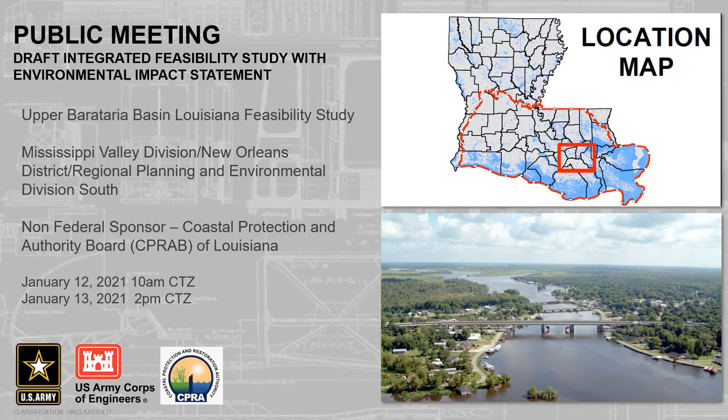Quick agenda for review. I will be discussing with you the purpose of this meeting, the authority, ongoing coordination, and overall schedule for the study. Then Matthew Boland, our lead plan formulator, will walk you through our feasibility level of design, process, and the methods that determined our recommended plan and revised levee system.

We are here to let you know that the Corps is completing a study to reduce flooding impacts to the Upper Barataria Basin through a structural alignment constructed to a 1% AEP, the 100-year future design, and totaling a little over 30.6 miles in length from Lulling to Raceland.

We have held public and stakeholder meetings from the start of the study in 2018 to keep communication open and transparent. We have held the pre-scoping meetings, scoping meetings, and draft report meetings over the last 2 years. These meetings were aimed at updating the public on our progress since you last heard from us, while gaining input from the public. We hope you will have a chance to read our current draft report, which can be found on the UBB website, and make comments by January 25th.

When we talk about creating or starting a project, the Corps needs 2 things from Congress. First, we need the authority. That is essentially permission to start a project or look at a concern. The UBB feasibility study was federally authorized through a House of Representatives resolution in 1998.

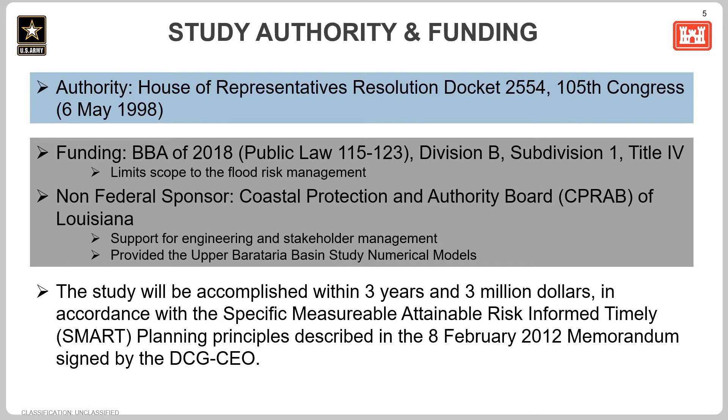I am now going to discuss our study timeline so that you can get a better idea of where we are in our 3-year schedule. Early on in the study, we looked at various ideas and ultimately determined a comprehensive levee system was the best way to manage flood risk within the study area. We presented the plan as the TSP in October 2019. Since that time, we have held our agency decision milestone in March of 2020 and completed feasibility level design on our tentatively selected plan, which resulted in some considerable changes to the alignment and impacts. And that is why we're here with you today.

Before we sent out the second draft, we completed several internal, technical, and quality control reviews, and now we are having the documents reviewed by the public, outside sources, known as the Agency Technical Review, and a policy review. When the public review ends on the 25th of January, we will be addressing comments and sending the report to our Office of Counsel before our final report leaves the district this March. Then, after several months of Washington-level reviews, we will have our Chief's report, the final product, signed in October 2021. Hopefully that gives you a good idea of what we have accomplished so far and what work we have remaining.

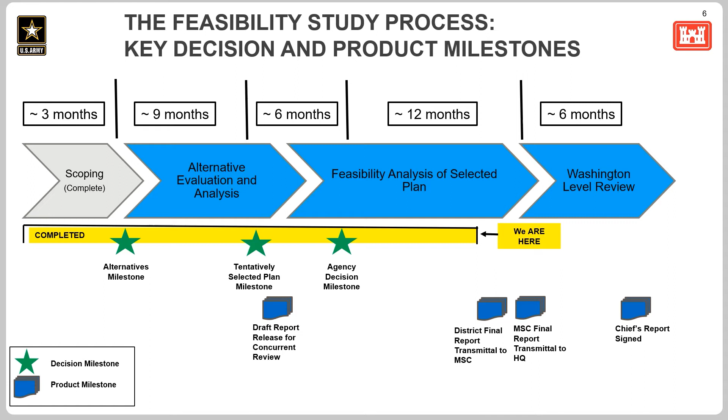About a year ago, the project delivery team came out with a draft report. Since then, we've had many changes during the feasibility design of the project, and we felt that we needed to go back out to the public to announce these changes in the project description.

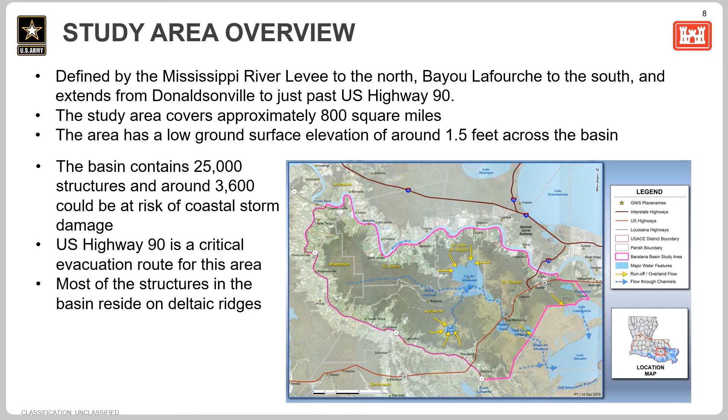Alright, the study area hasn't changed between draft releases and still includes the communities of Ascension, Assumption, Jefferson, Lafourche, St. Charles, St. James, and St. John the Baptist. The study area is bound to the north and the east by the Mississippi River Levee and to the west by Bayou Lafourche. And at the south it extends just past Highway 90. The study area covers approximately 800 square miles and is characterized by low, flat terrain with wetlands, numerous navigational canals, drainage canals, and natural bayous that drain into Lake Salvador and eventually into the Gulf of Mexico.

As a recap of the draft report, the project delivery team developed a total of 10 alternatives, not including the no action option. These alternatives consisted of structural and non-structural measures and combinations thereof. Some examples of structural measures were the incorporation of ring levees, flood walls, flood gates, and pump stations. Some examples of non-structural measures were house raisings, dry proofing of non-residential structures, and buyouts. After a few iterations of the formulation process, Alternative 1 was determined as the tentatively selected plan, or TSP, with the highest net benefit and benefit to cost ratio above unity.

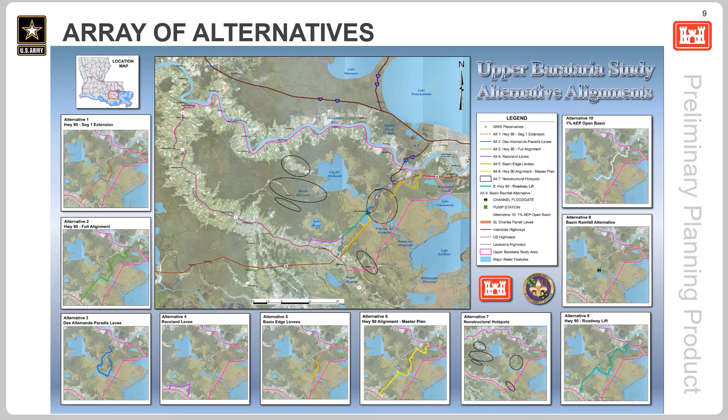The first draft report release proposed Alternative 1 as the tentatively selected plan. It was an 18.3 mile levee proposed, which was the red line in the image, and it extends out from the St. Charles levee, which is the light brown line in the image, extending from the Mississippi River levee down to just south of Paradis.

Then it raises the existing Sunset levee, crosses the bayou just south of Dufresne Ponds, and continues parallel to US Highway 90 until it reaches high ground near Mathews. It was proposed as a 7.5 foot elevation levee with a total cost of $514 million and a benefit to cost ratio of 1.5. This levee would have been built as a 2% AEP levee,

but would provide much more like a 100-year level of risk reduction based on the optimization of storage and allowable overtopping rates in the area where structures would not be affected. In order to maintain the resiliency during overtopping, the backside of the new proposed levee and the entire existing St. Charles levee would have been covered with HPTRM, which is high performance turf reinforcement matting, to prevent the backside of the levees from being eroded during overtopping.

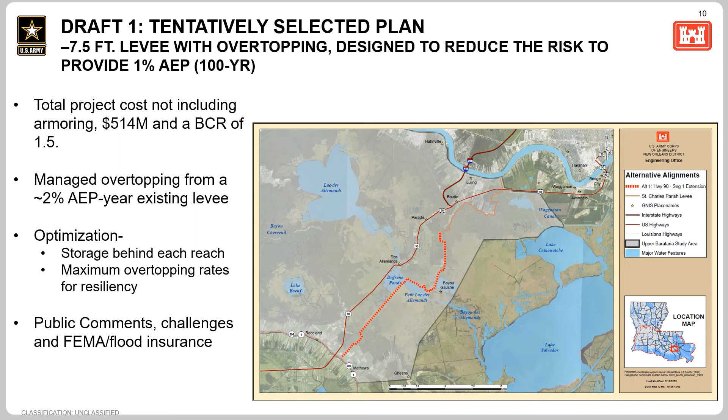This is a recap of the tentatively selected plan for the first draft report. We proposed an 18.3 mile levee extending out from the existing St. Charles levee system. The existing St. Charles levee resides at a 7.5 foot elevation. The length of 18.3 does not include armoring of the St. Charles levee. We plan on armoring the whole backside of the system to allow for the overtopping of water into areas where there wouldn't be structures damaged.

The total footprint of direct impacts on this alternative were 345 acres. This alternative would be built to a 2% AEP, but would perform much more like a 1% AEP with optimization of the levee elevations and the rate of overtopping in those areas. There was no non-structural plan developed at the time. We were still waiting on H&H modeling results at that time to put out that information. With the current plan, we do have that now. The total estimated cost of this plan was $514 million. The benefit to cost ratio was a 1.5, and the average annual net benefits were somewhere around 30.3 million.

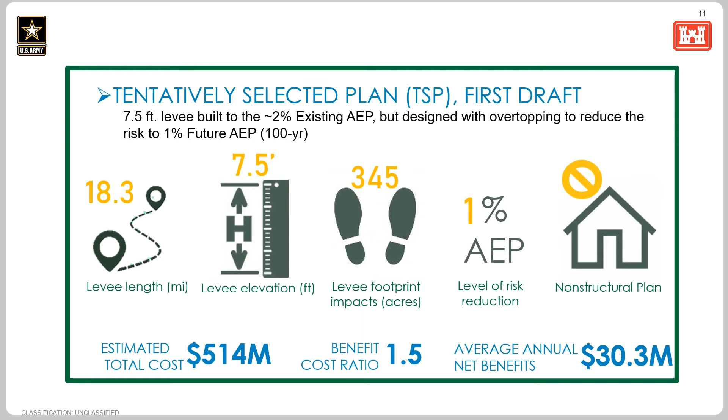As you'll see in this section, the feasibility design significantly transformed the tentatively selected plan. Therefore, it was indeed recommended that the second draft go back out for public review. As we mentioned a little earlier, the H&H with project modeling had not been completed up to this point in the study. As soon as the with project modeling was completed, the PDT determined the 7.5 foot elevations would not be sufficient in order to withstand the significant overtopping rates. The levee elevations had to be increased significantly. To be a complete system across the basin, the existing St. Charles levee also had to be elevated to reduce the risk of flooding and to address deficiencies along the existing system.

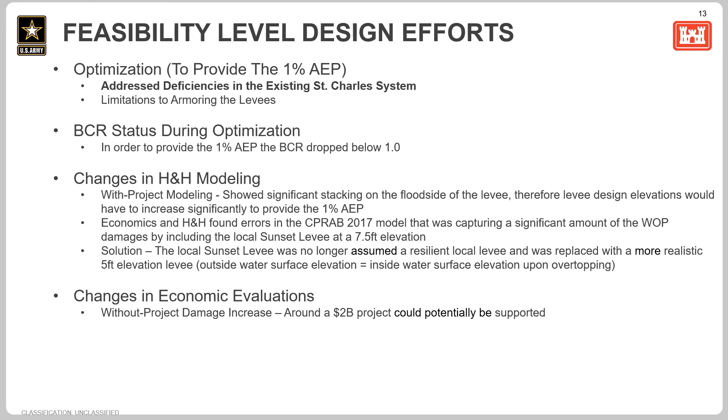At this point in the study, our BCR dropped below 1.0. But we looked back into the H&H modeling, the PDT got together, and we found some more without project damages. With some adjustments to the existing levees and to the model, there was a significant increase in the damages prevented, and that came out to be around $2 billion of project that we could support.

The optimized Upper Barataria Basin second draft tentatively selected plan is a structural alignment constructed to the 1% AEP, which is the same thing as the 100-year future design, totaling a little over 30.6 miles in length. The complete system starts at Luling, where it connects to the Mississippi River levee. Continuing south, the TSP improves upon and updates the deficiencies in the St. Charles Parish levee, then crosses Bayou des Allemands with a 270-foot barge gate structure, and continues parallel to US Highway 90 before it ties into high ground across the basin near Mathews and Raceland.

This levee has been designed to the HSDRRS specifications with 1-on-4 slopes and 10-foot crowns for all levee sections. The first lifts of this levee will occur in 2026 and will be expected to be in the range of 16 to 18.5 feet in elevation over the 50-year period of analysis.

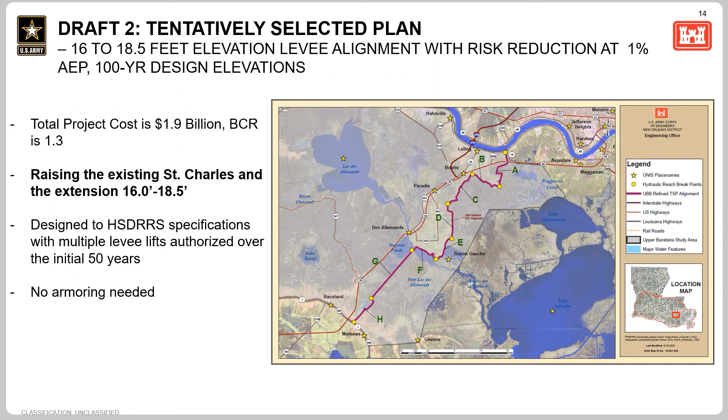Based on the current hydraulic surge modeling, the 1% AEP design could increase water surface elevation in areas immediately outside the risk reduction system during events without project conditions. The induced flooding risk is greatest in the community of Bayou Gauche.

Due to the presence of existing local flood risk reduction measures in Gheens and Mathews, the extent of induced flooding risk in those communities is more uncertain.

In order to prevent increased risk to people and structures which are already located in high-risk areas, a preliminary non-structural compensation plan has been developed as part of the TSP.

Mitigation options such as flowage easements, structure raising, dry flood proofing of structures, and acquisitions, which are buyouts, were all reviewed, but due to the vast scope of this project and the limited amount of available information at the time, a worst case scenario, which is the most expensive option, was assumed - acquisitions and buyouts of structures.

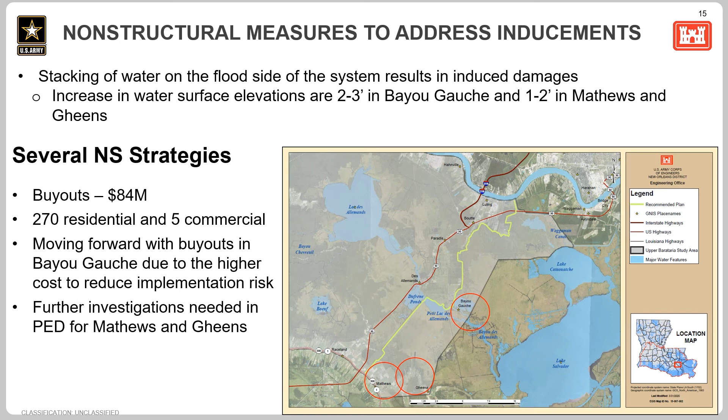These structures include 270 residential structures and 5 non-residential structures in the impacted areas, as you see in the red circles. The potential induced damages and mitigation for economic damages would be further addressed during PED. And finally, an individual investigation and mitigation for each structure, if appropriate, will be done during PED.

Our optimized TSP from the second draft report is now a total of 30.6 miles, with improvements to 12.3 miles of the existing St. Charles levee. The elevation of the levee ranges from 16 to 18.5 feet. We're still holding on to that 1% AEP, so it will provide the 100-year level of risk reduction without armoring.

The impacts have significantly raised. They went from in the 300s to 1,074 acres total, and those are direct impacts - the actual footprint of the levee itself.

As we stated in previous slides, 275 structures are outside the system - 270 of those are residential and 5 of them are commercial. The total project cost is now estimated at $1.9 billion, having a BCR of 1.3 and an average net benefit of $90 million.

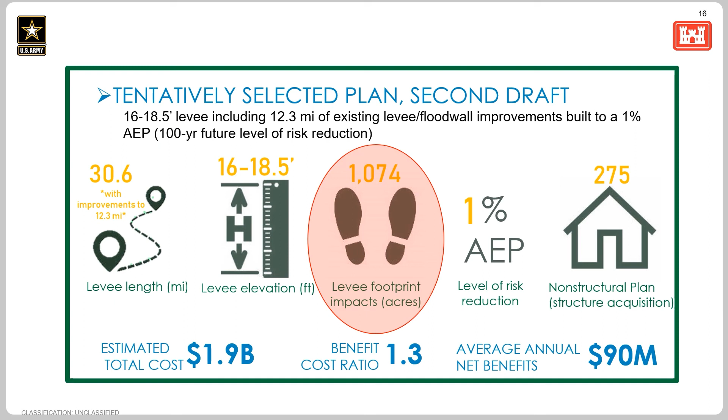This draft feasibility report is compliant with the National Environmental Policy Act, or NEPA. We have initiated consultation under Section 106 and have been developing the programmatic agreement to fulfill the responsibilities during the pre-construction engineering and design phase of the project, also known as the PED phase. We have been coordinating with the federal agencies on the threatened and endangered species in the area.

As it comes to material borrow, there are many available borrow sources along the basin's edge, primarily farmland. Mitigation plans have been established in the main report - you can find that in the report's appendices.

Another thing to note with the 270-foot barge gate, this barge gate will stay open until it's triggered to close during a coastal storm event. And from the last session, we still believe the structure will not impede any recreational or commercial boat traffic in the area.